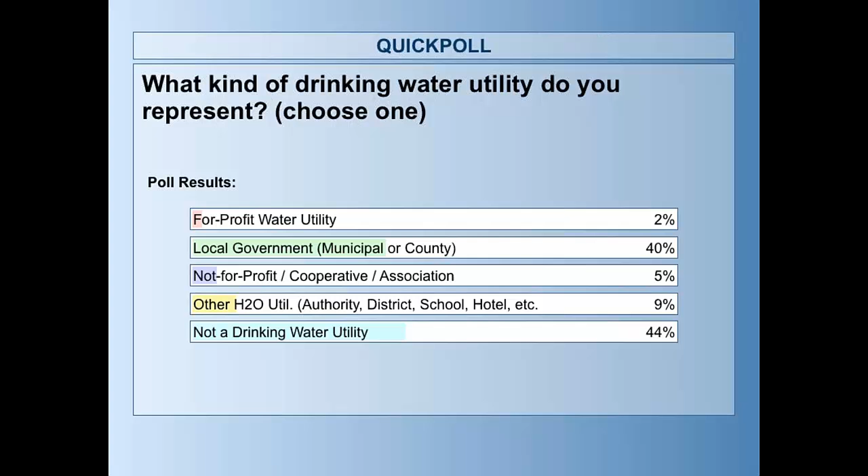Now, before I turn the presentation over to our speaker for today, I do have 2 quick polling questions for you. The first one is, what kind of drinking water utility do you represent? Please select from one of the following: a for-profit water utility, a local government, either a municipality or county, a not-for-profit, cooperative, or association, or another water utility such as an authority, district, or hotel, or you're from a non-drinking water utility. And getting ready to close the poll in 3, 2, 1. As you can see, it looks like we're a pretty close tie between a local government or a non-drinking water utility.

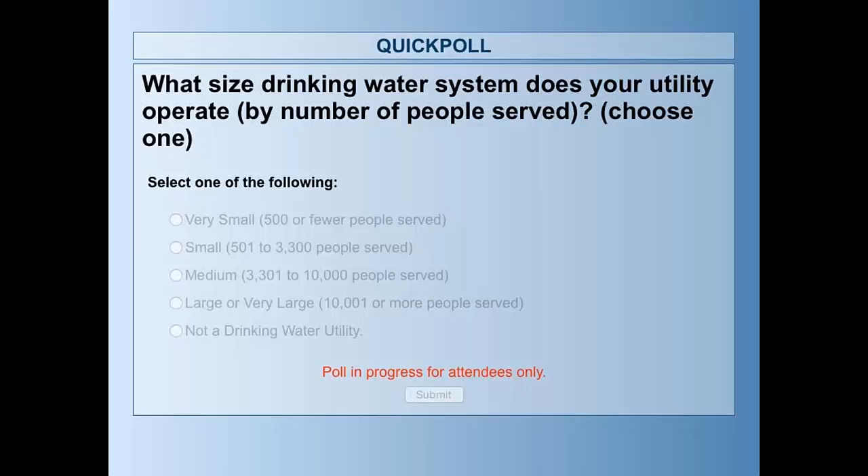And the second quick polling question is, what size drinking water system does your utility operate by number of people served? Please select from one of the following: very small, small, medium, large or very large, or from a non-drinking water utility. And getting ready to close the poll in 3, 2, 1. As you can see, the majority goes to a non-drinking water utility, followed by medium, and large and small water utilities are pretty close.

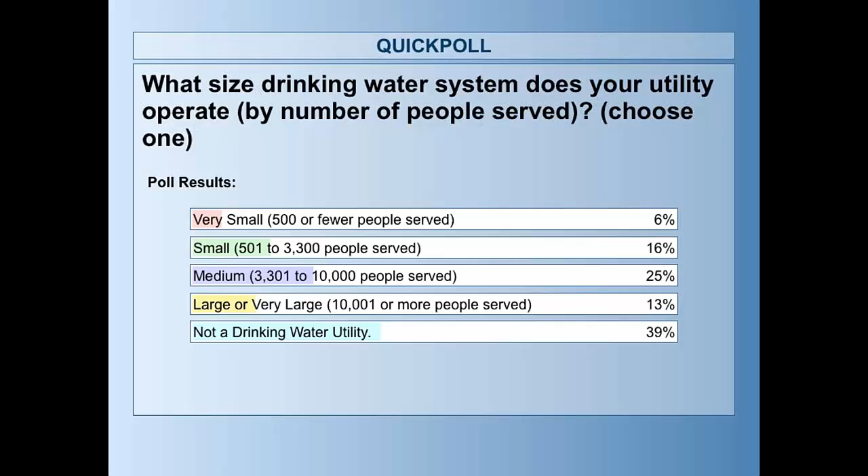Okay, I'm just trying to get my screen. Savannah, is my screen showing? Yes, it is. Okay, great.

All right, thank you, and welcome everyone to today's webinar titled, I've completed my water audit, now what? This is webinar 3 in a series of water loss webinars that we've conducted.

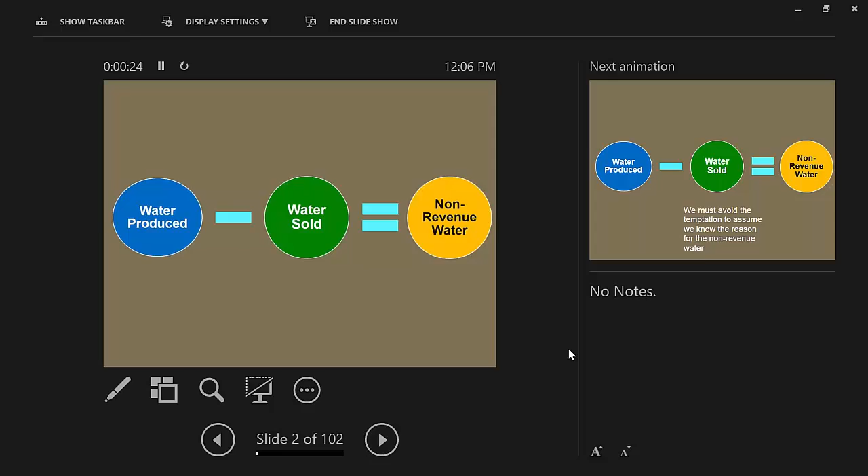I want to do a quick review here. Change your display. We can see your... Okay, hang on one second. Okay, did that fix it? Yes. Okay, sorry about that.

All right, so we'll start with water produced minus water sold is our non-revenue water. We don't want to have the temptation to assume that we know the reason that the non-revenue water exists. We don't want to assume that we have all the answers of why that non-revenue is there, what makes up that non-revenue, because we might make the wrong decision.

So imagine that you have a car and it's not running well. There may be several reasons why. Some might be small, low dollar issues. Some might be large, high dollar issues. So what would happen if we just jumped to the conclusion that it was my transmission? I took it to the car shop and said, without investigating any further, my car's not running well, go ahead and for $3,000 or $3,500 fix my transmission. When I get the car back, it still might be running poorly because maybe that wasn't the problem.

We wouldn't do that with our cars. We would ask somebody to evaluate the car and see what was going wrong because we wouldn't want to spend money in the wrong place. It's the same thing with our utilities. If we don't know the makeup of that non-revenue water, we may apply the wrong solution. So we don't want to jump to the end until we investigate it. And that's because non-revenue water includes a lot of things.

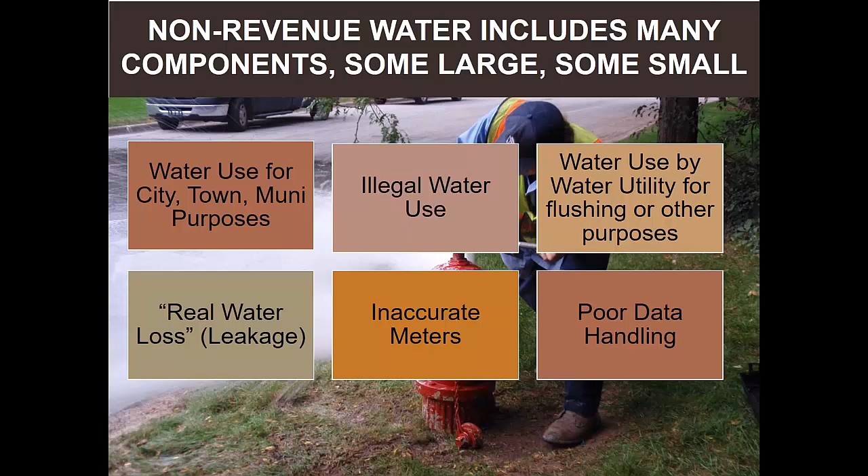There are 6 different types of factors that go into the non-revenue water. Sometimes we jump to the conclusion that all of our non-revenue water is water leaking out of our system, or it might all be inaccurate metering, and that would not be accurate. So we want to keep in mind that non-revenue water is 6 different kinds of things, and do a thorough evaluation of our problem before we make conclusions. We have to analyze the problem before we can address it.

A few highlights from that webinar are that the most important piece of data is the volume of water supplied to the system. When we think of the overall balance of water, all the columns add up to the same amount. The column that sets the standard is the volume supplied, and that has to equal the water being used for all these different purposes. The real water loss is at the bottom. We get the real water loss number by taking our water supplied and subtracting all the other uses of water.

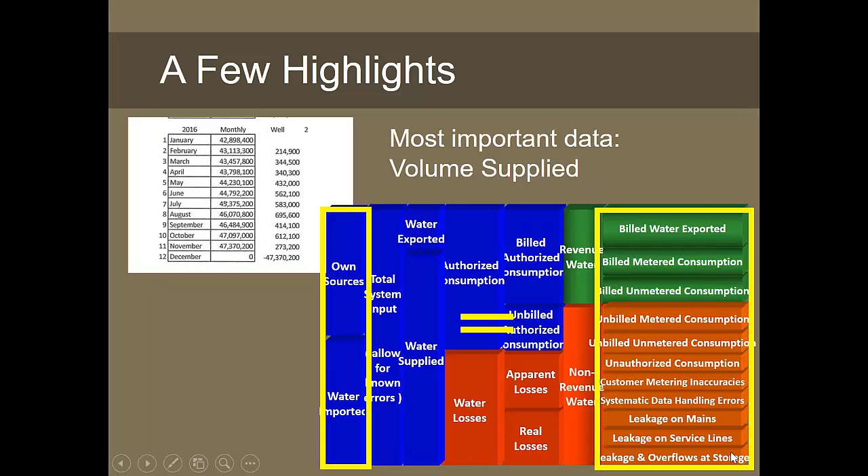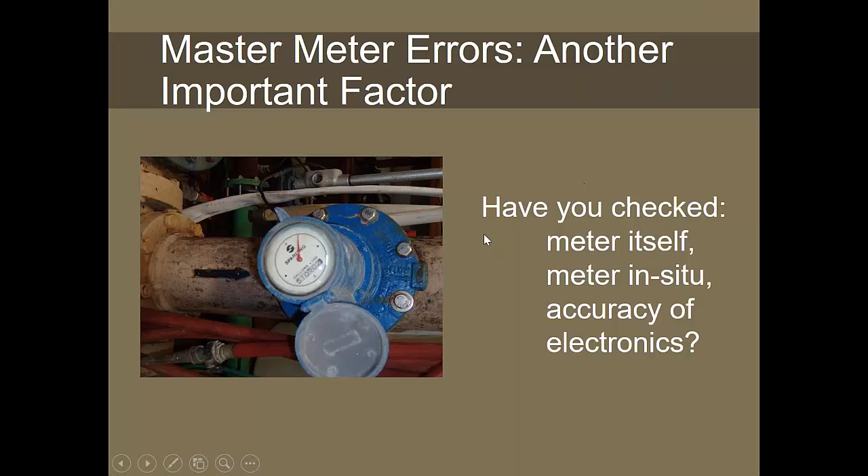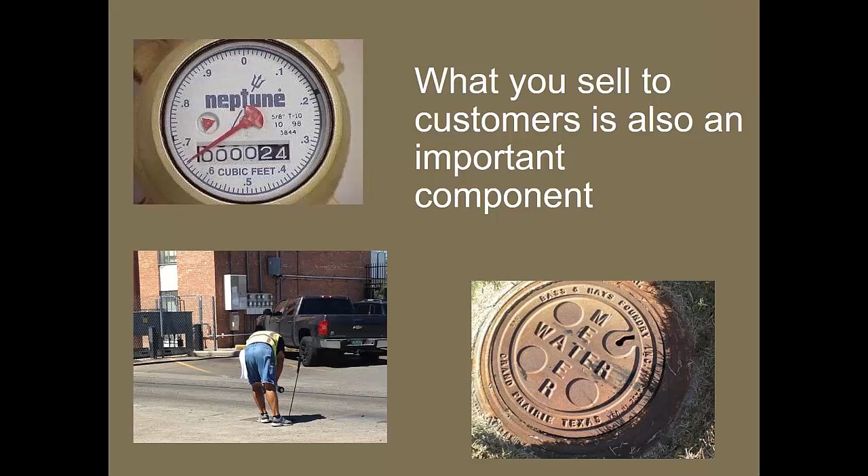So if the number for water supplied is off, it's going to create a problem for our real water loss calculation. We also want to think about the master meter errors. We want to know if we've checked the meter itself, the meter in its installation, and the accuracy of any electronics, because that can have a big impact. Another important factor is the water that we sell to our customers, because that's a big component of the water sold.

At the beginning, our data quality may not be very high. We might be a little intimidated about gathering the data. We might be missing pieces. Don't worry about that. If you start your audit and just jump into it, you can figure out where to make improvements over time. So just go ahead and start. The water audit itself uses the American Water Works Association water audit software. The software is free and available on the AWWA.org website.

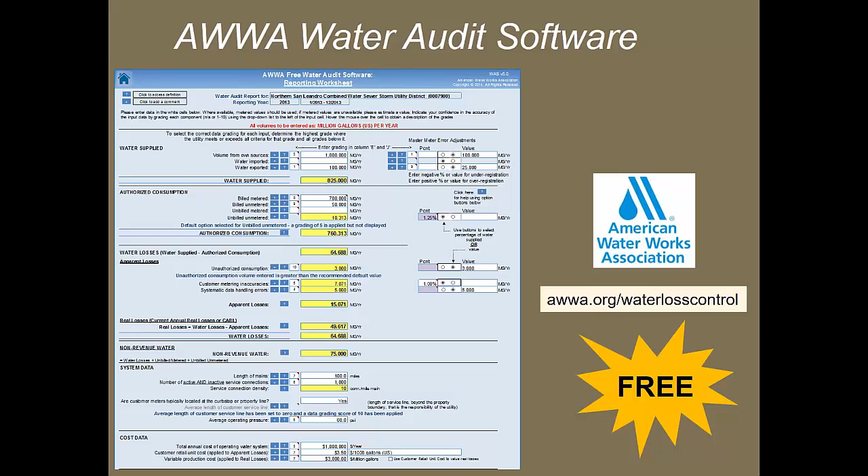And you can get that by registering, which is a free registration, and then downloading it to your machine. You'll begin the audit by looking at the instruction page, entering some information there, then put your data in the data reporting sheet, and then finally you'll be doing a data grade. So each input that you put in, you'll give it a data grade to say the policies and practices that went into getting that piece of data.

And the most important thing when you're doing your data grades is to be honest about what the data grade should be, because the right data grade is the one that accurately reflects your particular situation. You don't want to just arbitrarily give it a 7 or an 8 or 9 out of 10 without really looking at your system, because you will have an overconfidence in your data if you do that, and you won't know where to make improvements.

Webinar 2 covered the data entry and the data grading procedure, and that's available on the efcnetwork.org website. So if you'd like to go the step further, once you've got your data, how to put it in and how to grade it, please access that recording for more information.

So let's assume that we've done our water audit. So what does the water audit tell us? There's 3 main components that we'll get out of the water audit. The first is a data validity score. The second is the value or the cost of water in different categories. And the third is the volume of water in different categories.

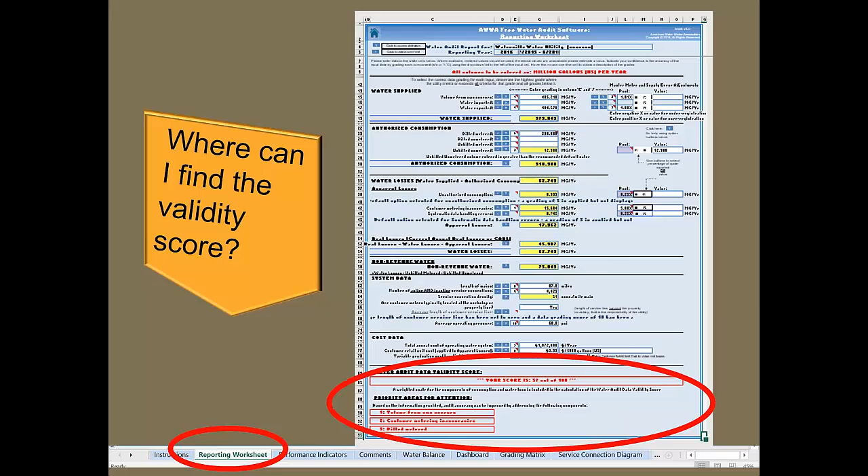Now, where can I find this data validity score? I would look on the bottom of the reporting worksheet, and the bottom of the worksheet is going to look like this. So our water audit data validity score is going to be a score out of 100. So in this case, we have 57 out of 100 for this example audit. And the screening range we have set is greater than 50, you're ready to move on to the next step, and below 50, you're not.

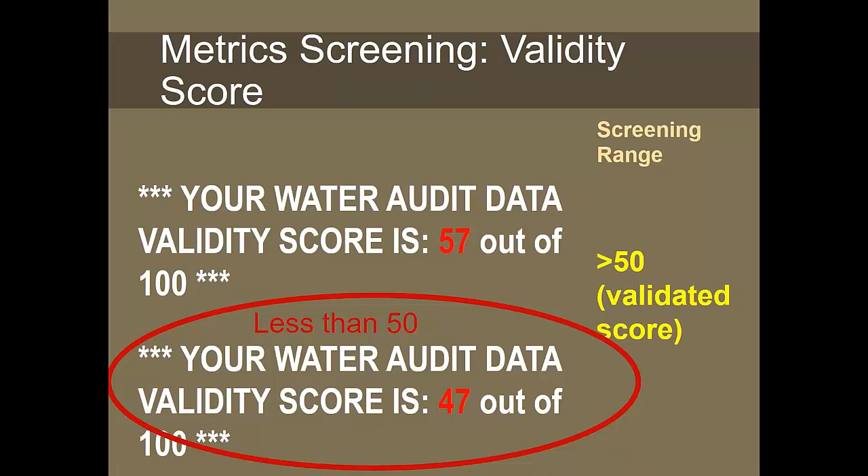So for the first example, 57 out of 100, that system is greater than 50. They can be ready to move on to the next step. Doesn't mean they won't do anything more to address their data, but it means that they're in a position where they can start doing more. And less than 50, you would want to stay with the data, with the policies and procedures that went in the data. Try to improve that and get above 50 before you go a whole lot further in the next steps.

So again, actions to take if your score is less than 50. We're going to look at the suggested areas of improvement to try to make those scores higher. We'll review data and look for concerns in the data. If you're 50 to 70, we'll look again at the areas of suggested improvement. We'll begin some next steps, but we'll still review any data weaknesses to see how we can improve. If we're above 70, we'll look at areas of improvement again, and we'll review the areas that have lower data grades. So we might have a pretty good score at 70, but there'll still be areas that may have lower data grades, and those would be areas that we could still work on.

The priority areas for attention are at the bottom of the reporting worksheet. It will give you the top 3 areas for your particular situation, and the data grades are not weighted equally, so it's going to give you the types of things that will have the most impact on your validity score. So the volume from own sources is often the first one up there because it is such an important number, and unless you have a 9 or a 10, it's probably going to be the first thing on the list, because that's where you'll have the greatest impact on the overall validity score. And then we'll give you the next 2 that will give you opportunities for where can I improve.

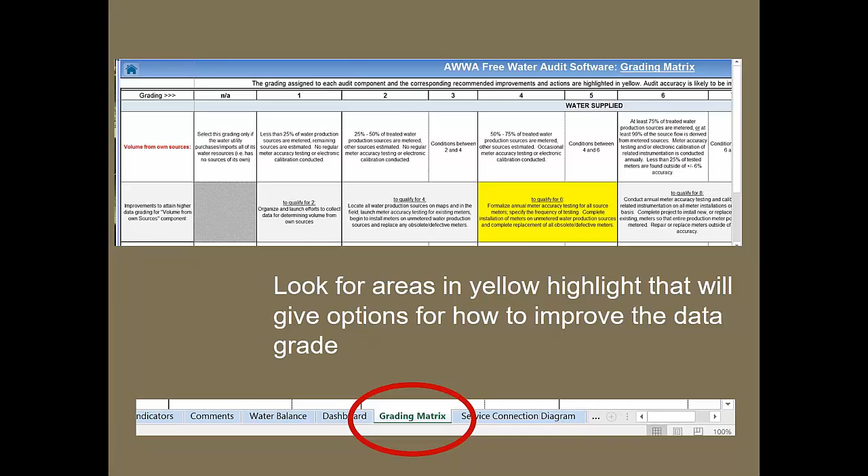You'll also have information in the grading matrix that comes with the water audit, and it will tell you, highlighted in yellow, what kinds of actions you can take to move to the next highest data grade for each of the data grades that you have in the system.

And there's also a water loss control planning tab in the water audit, and it will tell you, highlighted in yellow, which area you're in. In this particular case, we were 57, so it's saying we are level 3 and is giving us suggested actions to take. And you can see that the lower your score is, the more they want you to stay with data handling. The higher your score, the more you can do with addressing non-revenue water.

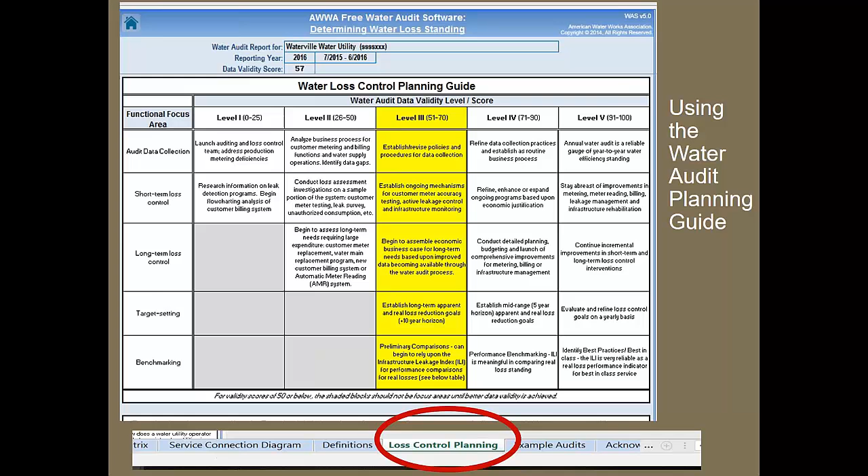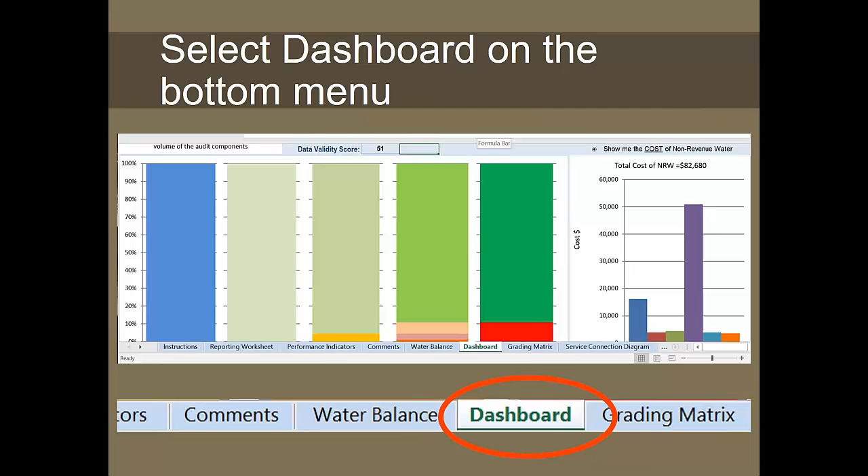So if we move on to looking at the values and volumes, the dashboard on the water audit will give you some information about the values and volumes. So you have an opportunity on the dashboard to toggle between show me the cost of non-revenue water and the volume of non-revenue water. So one thing that's interesting to note is the value and volumes don't always match. So the highest volume doesn't necessarily mean it's the highest value. It really depends on your system characteristics, how much you charge for water, how much it costs to produce water.

So we have to think about what's more important to us, saving the water or increasing the revenue, because we may decide to take a different action depending on what our goals are and what we're trying to accomplish. Or we may decide to do one first before the other. Maybe increasing the revenues could help us address some of the water loss and volume issues.

You will also in the water audit get some performance indicators. On this page it will give you things like the apparent loss, total volume, the real losses, the water losses combined. It will give you some information about the cost of apparent losses and real losses. And then it will give you some metrics for operational efficiency, so real losses per connection per day or real losses per length of main per day.

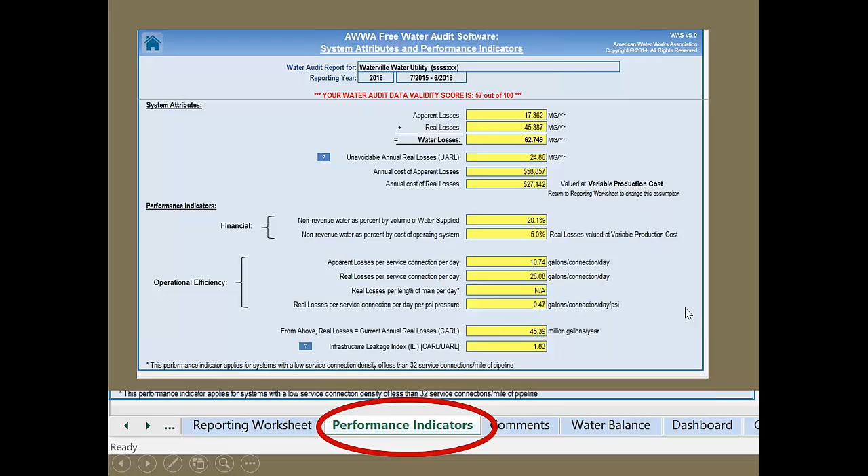And we can use a screening range to kind of see whether we're falling within the range of validated audits. So some folks got together and looked at a whole bunch of audits and said, once they had validated them, what was a typical range? So for real losses per service connection per day, it's typically between 20 and 200. And real losses per length of main per day is 400 to 4,000. Your utility will get one of these calculated or the other. You won't get both. So you can look and see if you're within the range of validated audits.

And what you can do with this is see where you are today, and you can choose a goal to reduce. So this particular utility is about 28. If they wanted to reduce the real losses, they could set a goal of maybe 25 initially or 20 initially and try to get that number down a little bit to reduce the real losses.

There's also the infrastructure leakage index. We will not spend a lot of time talking about this today because small utilities typically don't have metrics that will allow it to be calculated. But if you have that calculated for you, the range is typically 2 to 10.

So what actions can we take to actually address our non-revenue water? So one thing to remember is that there isn't one right answer for if I do this, my non-revenue water will be reduced to a very low extent and I'm done. You really have to have a whole toolbox of a bunch of different approaches to address the different kinds of non-revenue water that you face, and you're going to have to apply them in a phased-in manner, trying to decide what's the most important thing for you to do first, second, third, etc.

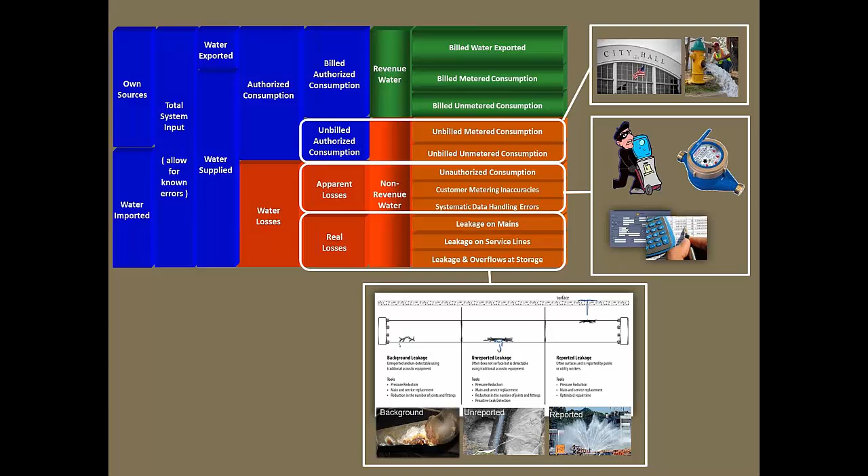But it's very, very important to realize that this is not a one-size-fits-all, one approach that will address water loss and take care of the problem. So they have three main areas for non-revenue water, three main categories: the unbilled authorized consumption, apparent losses, and real losses. So we'll go through each of those and look at some things you can do to address each of those.

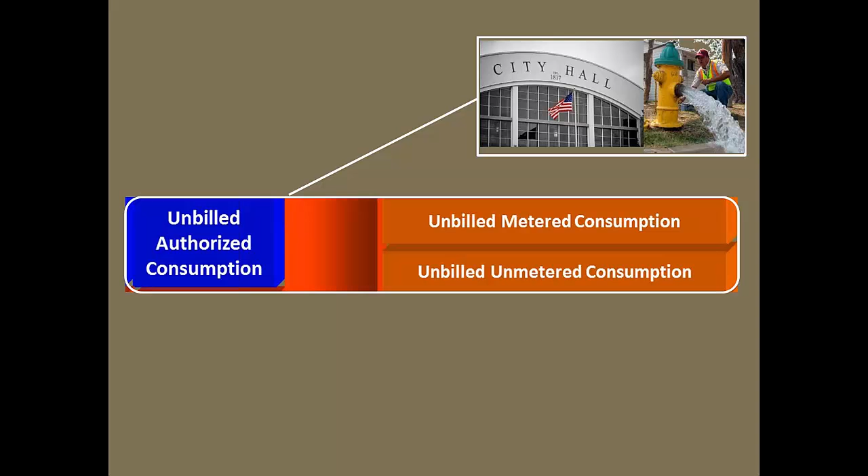When we talk about unbilled authorized consumption, these are folks that we're allowing to use the water but we're not billing. It falls into two different categories: those we meter and those we don't. Metered installations are typically permanent uses of water, like a building or a park, where we're sending water but not sending a bill. Unbilled, unmetered uses would be flushing, firefighting, things we wouldn't typically meter but do on a non-permanent basis, like moving around the system to flush lines.

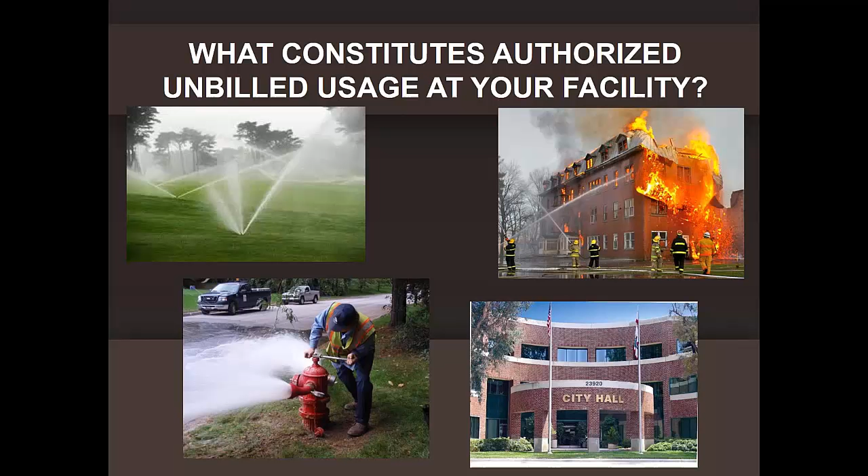You want to think about what constitutes that authorized unbilled usage at your facility. How much firefighting do you have? How many public buildings do you serve water to that you don't bill? How much flushing do you do? How often do your fire company folks come out and flush hydrants and test them? Do you have any parks or golf courses that you provide water to that you don't bill? The big issue is, do you meter all of your permanent uses?

If you don't, you really want to install meters for several purposes. One is to understand in your water audit how much of that authorized unbilled use is there. You also want to make sure people are using the water efficiently, because these are folks who aren't being billed, so there's no price signal for them to conserve. Also, if there's any problem like a leak, reading the meters on a routine basis can alert you that there's a problem, and you can go fix it.

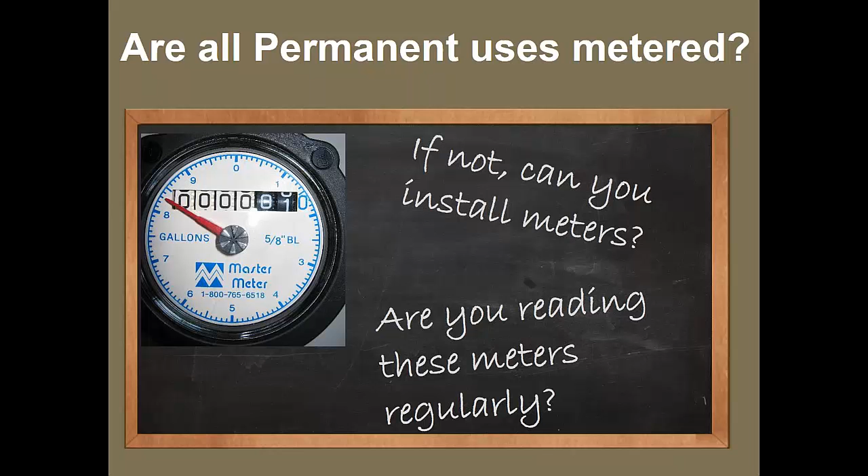So if you install the meters, you want to read them regularly. If you read meters monthly, you want to read these ones monthly as well. If you read quarterly, you want to read them quarterly. You want to be on the same cycle of reading all the other customer meters so you can gather that information about what's going on at your unbilled authorized uses.

Then you want to think about whether there are ways to estimate those non-permanent uses, like flushing and fire hydrant testing. You can use a default value in the water audit, and probably to begin with you'd use that default maybe even for a couple of years. But after that point, you'd want to find ways to improve the quality of that data and get a better estimate of how much water is being used.

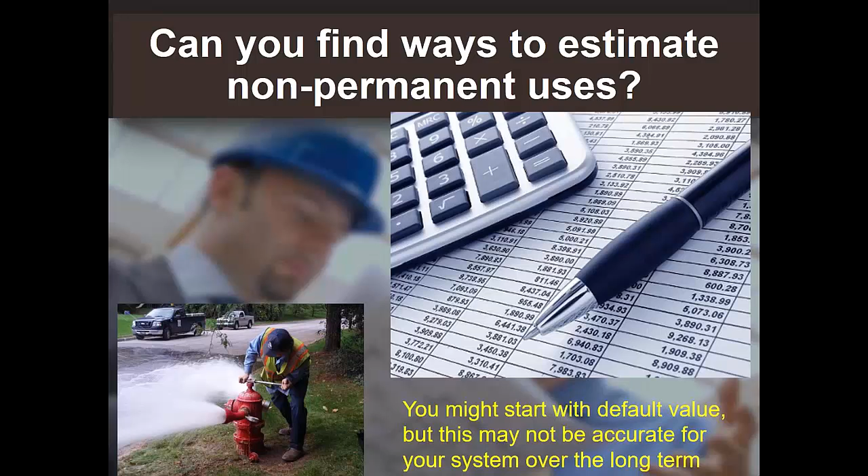Think about ways you could temporarily meter flushing, count how many hydrants you flush, how long you flush them, that sort of thing, to try to get a handle on how much water you're actually using in this non-permanent way. With that information, you can figure out how much water by volume is authorized and unbilled for each of those uses.

How much do I put on a park? How much do I put on a ball field? How much do I send to City Hall? How much do I send to the airport, etc.? Then you can figure out the value or cost of each of those using your customer retail cost. Dollars per 1,000 gallons could be applied to each of these, so you can tell how much money and how much water is going to each of these uses.

A couple things you can do with that information. You can share the value with the entity that's receiving it. So if you're sending it to a building, you could tell the folks who manage that building, hey, you've used this much water, it's cost the city this much, or you've received this much benefit from the water. That gives them a chance to look at ways they could improve, and it signals the benefit received and how they might help you by reducing uses.

You also want to make sure it's transparent, that the governing body knows what each of these uses are and can make decisions about whether any of those currently unbilled and authorized uses should be changed to billed authorized uses. Is there any customer that currently receives no bill that should receive a bill? They can really decide which ones should remain and which ones should change. In summary, we want to know what is authorized and unbilled, so we want to know what falls in that category.

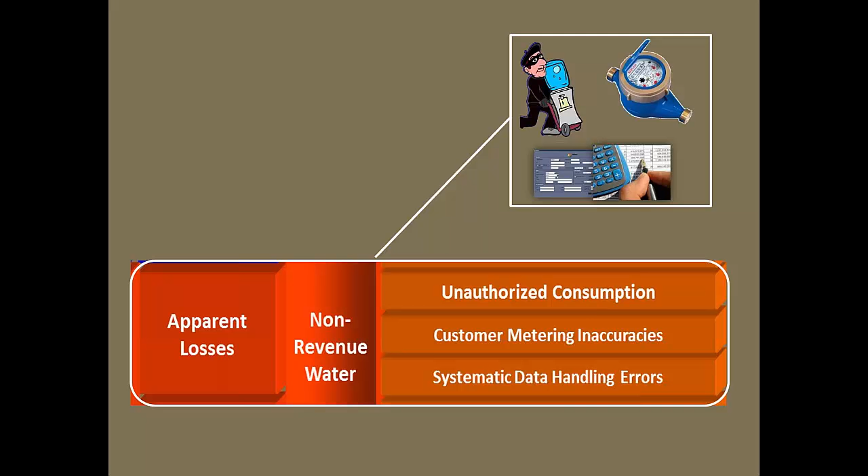When we go into apparent losses, we have three categories: unauthorized consumption, customer metering inaccuracies, and systematic data handling errors. Starting in this area, we have what we call the 4 pillars of apparent loss control.

We look at customer meter testing and replacement, and theft deterrence, trying to keep people from wanting to steal. Then there are two types of quality control with our data: when we get our meter readings and transfer those to the billing system, trying to make sure that process is done well, and looking at our billing procedures when we transfer that data to the archives.

And then there'll be some that's economic to reduce. So you're just looking at where you can spend your money wisely to reduce the amount of apparent loss and not go overboard investing way more than the benefit you would receive.

If you look at customer meter accuracy testing, this is pretty complicated because you have a lot of meters. They could be commercial, institutional, or residential, different sizes, different amounts of use. So it gets much more complicated than looking at your master meters, where there are probably a lot fewer of them and it's easier to run a meter testing program.

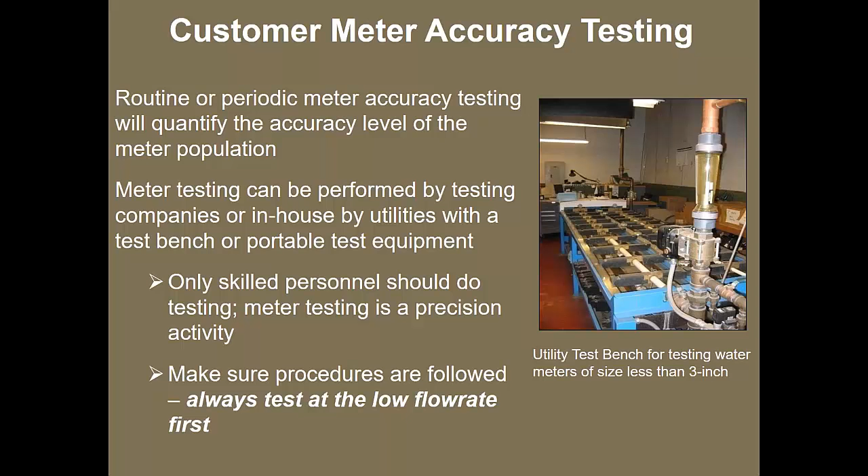But you can test your customer meters, and they can be done by an outside firm, or you can do it in-house if you have the right equipment. You want to make sure you have the skills and ability to do the actual meter testing. You don't want to take this on if you don't have that capability.

And the accuracy testing can be done over time, because it's really hard to get out there and do a full-bore program right off the bat. So you might choose to test certain meters at the beginning and then build in other phases of the program. Think about ways you can set goals and which ones you'd want to do first.

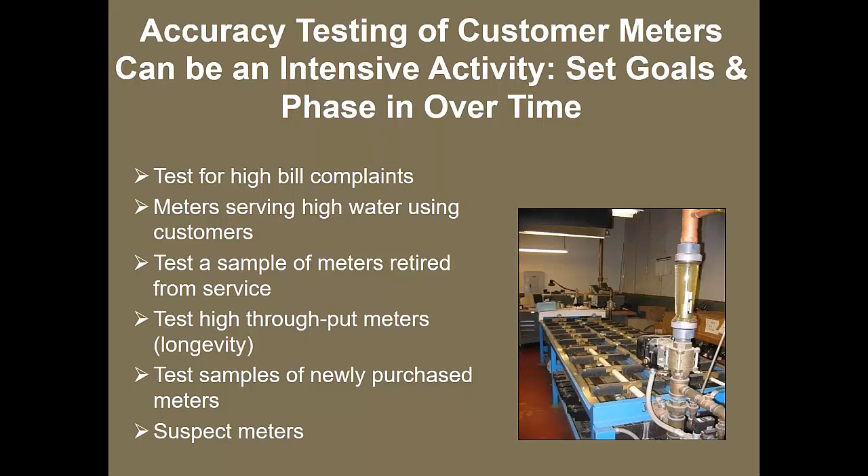Would you want to choose the ones that had the highest volume? Would you want to choose the ones that had the most complaints? Would you choose a certain type of meter or a certain size of meter? Anything like that could be a starting place, and then you can always add in other categories later on.

The AWWA M6 guide is a good guide for selection, installation, testing, and maintenance of meters. So if you want more information about meters in general, there's some good information in that guide about how to do the testing procedures and that sort of thing.

You can also talk to your neighboring utilities and that sort of thing, to ask them how they've done meter testing and who they've worked with, to try to get options for how you might do it.

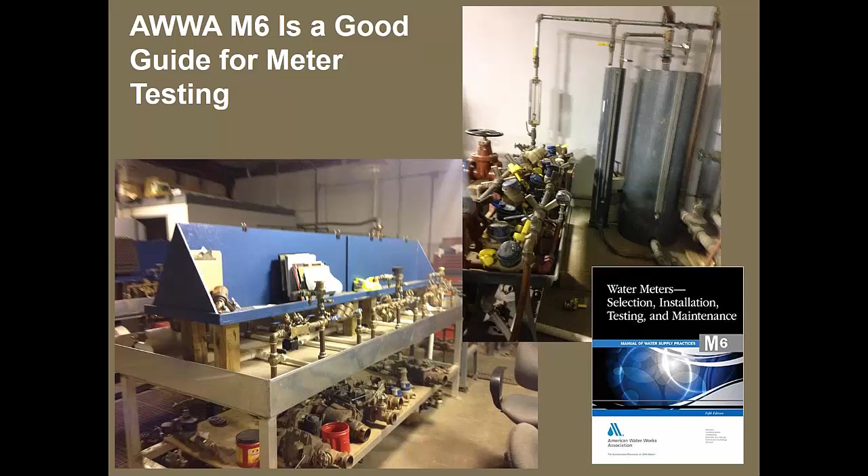You might also check with a larger utility. Many of the large city utilities have meter testing equipment, and they may know a lot about how to do meter testing, or may even be able to work out a deal where you pay them a certain amount of money to do the testing for you. So look at all the options available to you and try to design a program that best fits your needs.

One example of having done meter testing in this small community: you can look at how the accuracy data could plot, versus the flow through the meter, the total flow.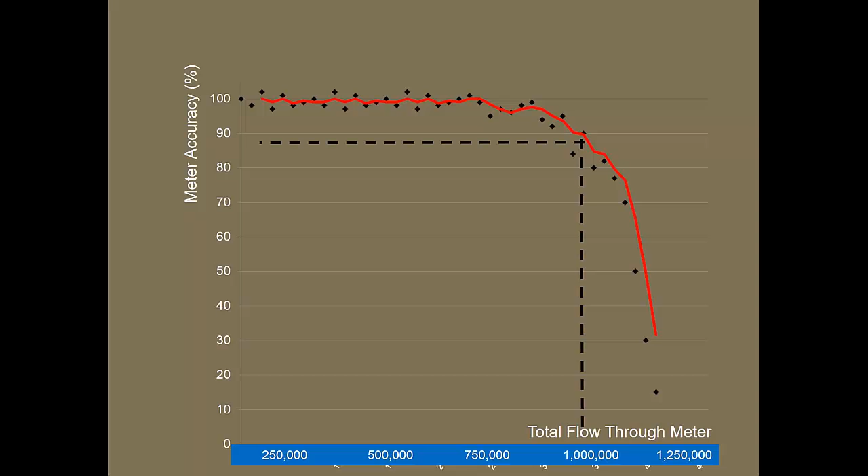You can see that the accuracy really started to drop off after 1 million gallons. So in this particular utility, if they found that 1 million gallons was a good breaking point, where meters start to get a lot worse in accuracy, they could design a program that says every time a meter hits 1 million gallons, we're going to take it out and replace it.

In data handling errors, we're looking at things that we do that cause errors in water auditing.

One example is if you have an archive system in your billing software where a new customer comes in July, and we take the data from January to June for the old customer and archive it. From a billing perspective, that may be fine; we don't need the information anymore, it's a different customer. But from a water auditing standpoint, that makes a huge difference, because we lost a whole half a year of flow that won't show up when we print out the totals from the billing software. If we have situations like that, it can be really problematic, and we need to find another way to gather that information, especially if you have a lot of customers switching during the year, since that could be a huge error in your data.

Another possibility is if your utility rebates money back after a large household side leak, saying 100,000 gallons passed through your meter, but it was a leak, and you've agreed to fix it, so we're going to rebate some of that back. Some billing software requires you to actually change the quantity to get the lower bill rather than just changing the amount of money you're going to charge. In that case, you will have lost a whole bunch of water that actually passed through the meter, and you need to account for that in your software. So somewhere you need to keep track of that water.

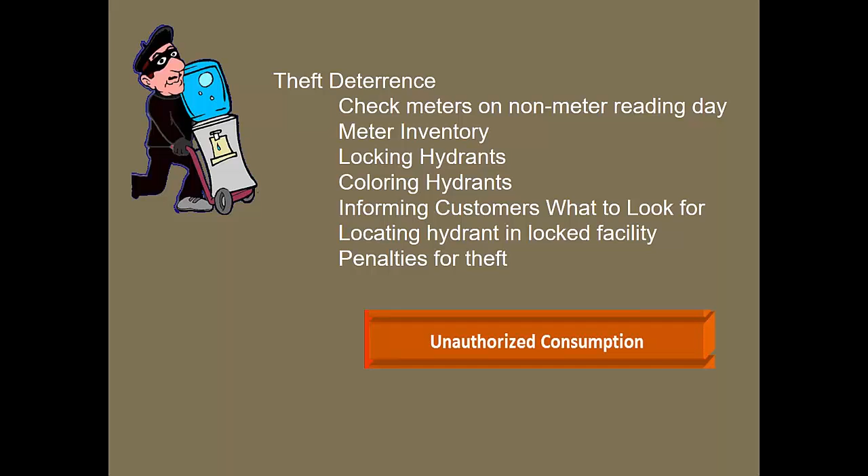You can have penalties for theft, and tell your customers to let you know anytime they see someone hooking up to a hydrant. You could also put a hydrant inside a locked facility so that's the only place water can be taken, relying on customers' eyes to watch for anyone hooked up to another hydrant. Again, how much effort you put into theft prevention really depends on your particular situation.

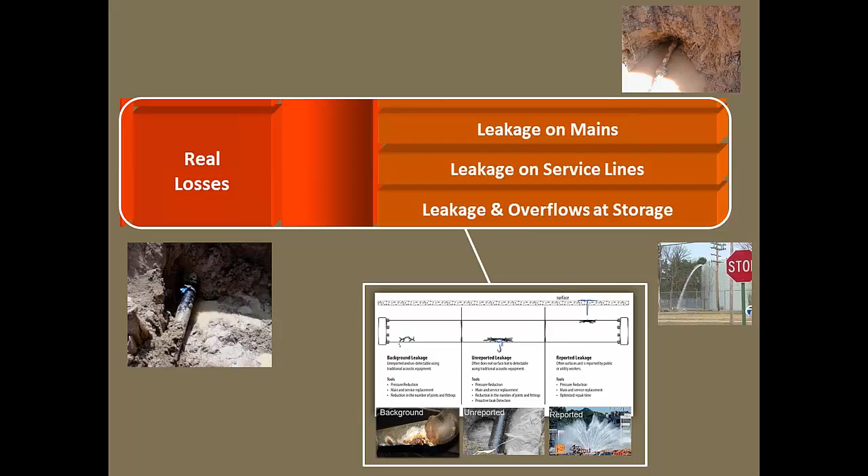Moving on to real loss, which is what oftentimes people focus on the most, forgetting the other two major categories of water loss. Real losses are leakage on mains, service lines, and overflows, and leakage at storage tanks. These are important components, but we can't forget the other two because they may be equally large or even larger in your particular utility.

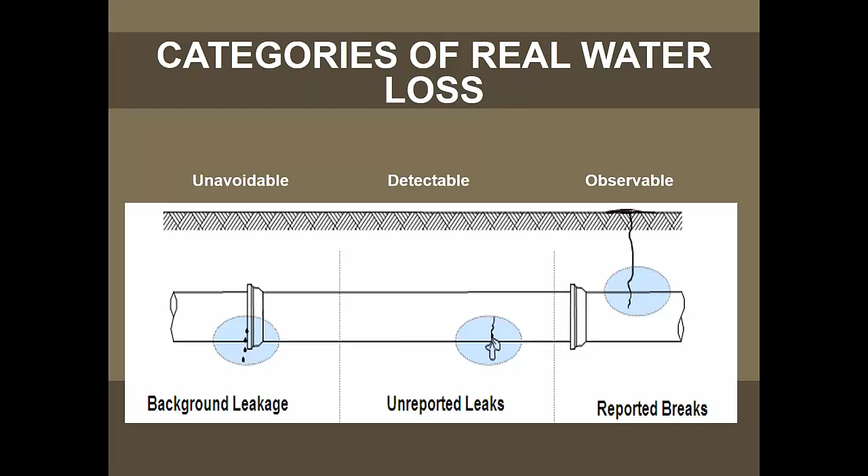When we think of real loss, there are three kinds of leakage. One is background leakage—weeps and seeps at fittings and joints. Then we have unreported or hidden leaks, which we do not see on the ground; there's no evidence for them, we can only find them by searching. And then we have observable or reported leaks, things we can find by seeing water on the surface, vegetation where it doesn't belong, sinkholes, or something developing that lets us know there's a water leak down below.

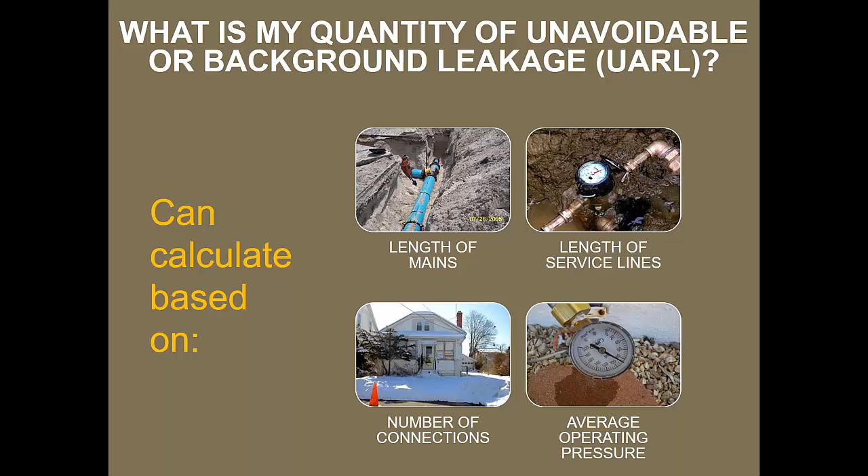The quantity of unavoidable or background leakage can be determined through system characteristics like length of mains, connections, and pressures. There is a range your utility has to be within for the equation to be valid, but the water audit software will calculate this for you if you're in that range. If not, it's a little more difficult to figure out the unavoidable or background leakage.

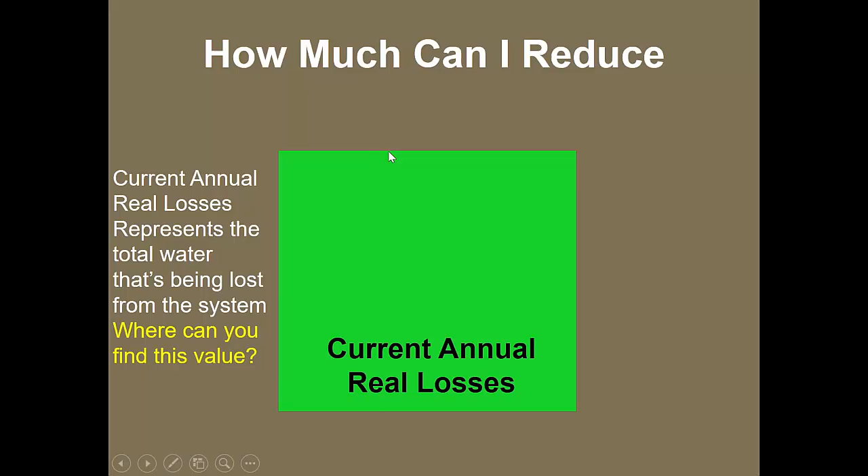So how much can I actually reduce my real water losses? If we think of this green box as the current annual real losses—the total losses—this value could be obtained from my water audit software. Then I have my unavoidable real losses, again obtained by looking at our system characteristics and using that equation. The difference between the two is our potential for real water loss reduction.

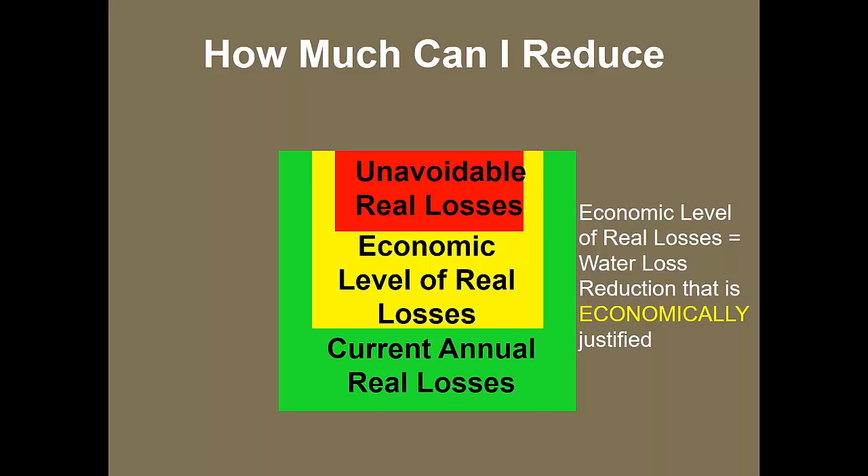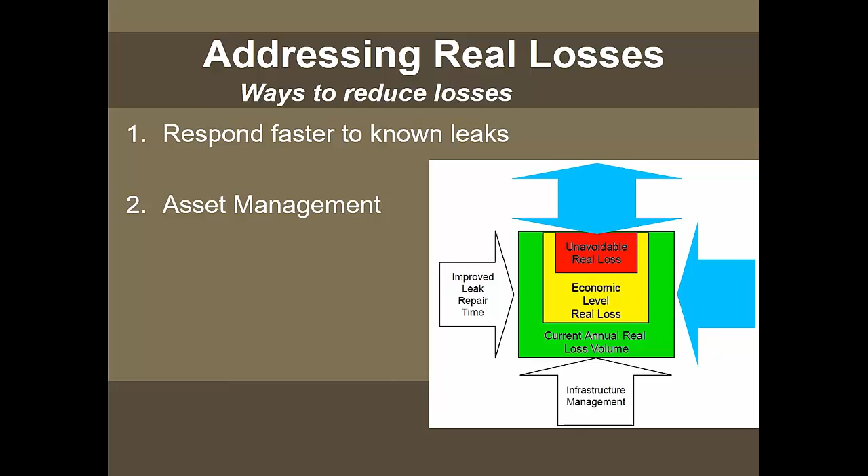So we have four pillars of real loss control. The first is improving leak repair time. The second is infrastructure or asset management. The third is pressure management. And the fourth is finding our hidden leaks.

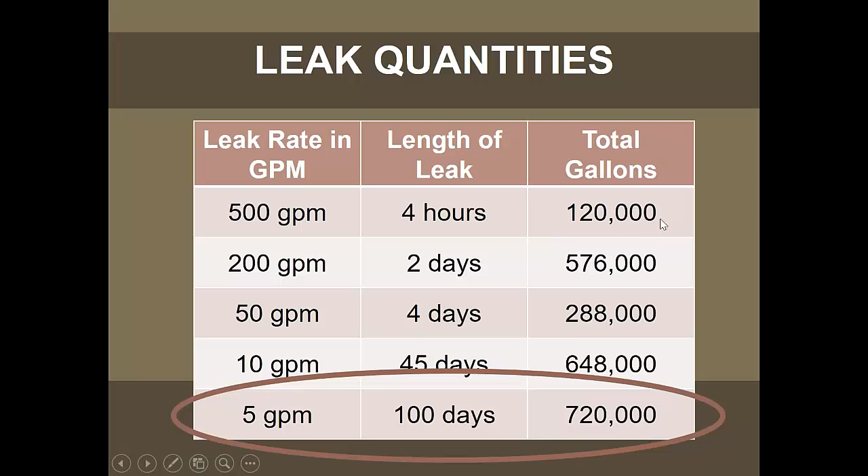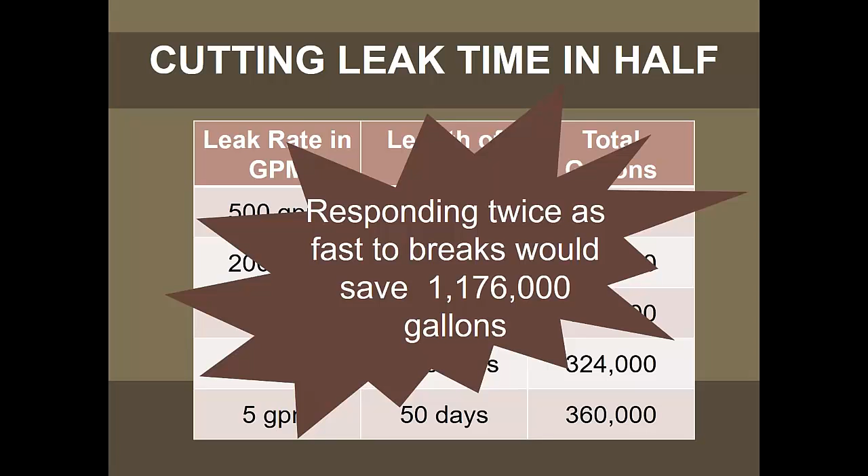If we respond to known leaks faster, look at this series of example leaks—the amount of water leaking and the time over which they leaked. A long duration leak of a low amount of water can actually produce quite a bit of water loss, way more than a high intensity leak over a short period. Let's say we cut the leak time in half. In just this case of these five particular leaks, that would save 1,176,000 gallons. The point is there is a savings to be had—if you can get out and fix leaks faster, you can save water, time, and money.

So you would have to make the case for needing additional resources. The reason you're probably not fixing leaks faster is you probably don't have enough personnel, equipment, supplies, etc. to do that. Make the case for what you would need to do it faster, what the cost is, what the benefits are, and increase the speed to the extent that your benefits, both economic and non-economic, outweigh the costs. There is a pretty good case to be made if you have a slow response time to reported leaks.

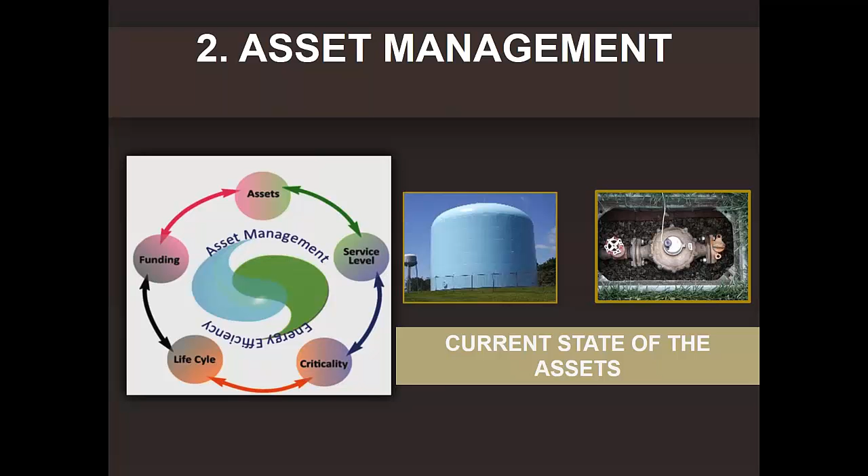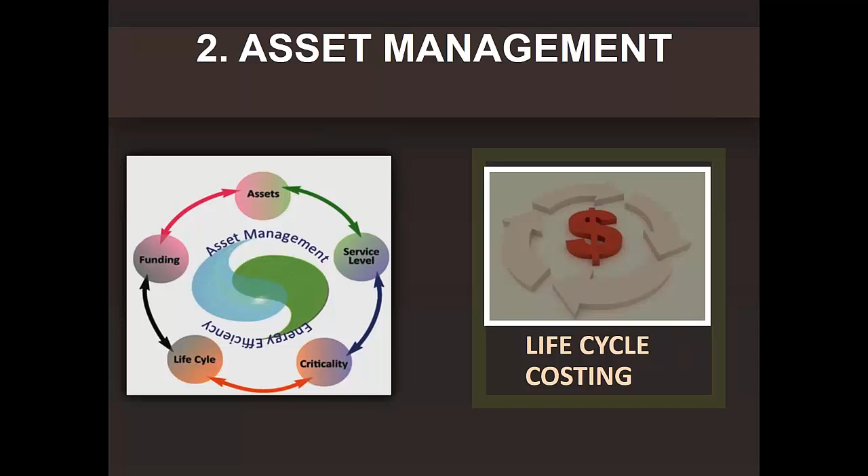With asset management, we're talking about the current state of the assets, level of service, what you want your assets to do, criticality—which assets are more critical to sustain performance—life cycle costing, how assets will be handled throughout their life, and long-term funding. If we apply that to the water loss situation, we're really looking at our pipes, so we want to gather data on our pipes.

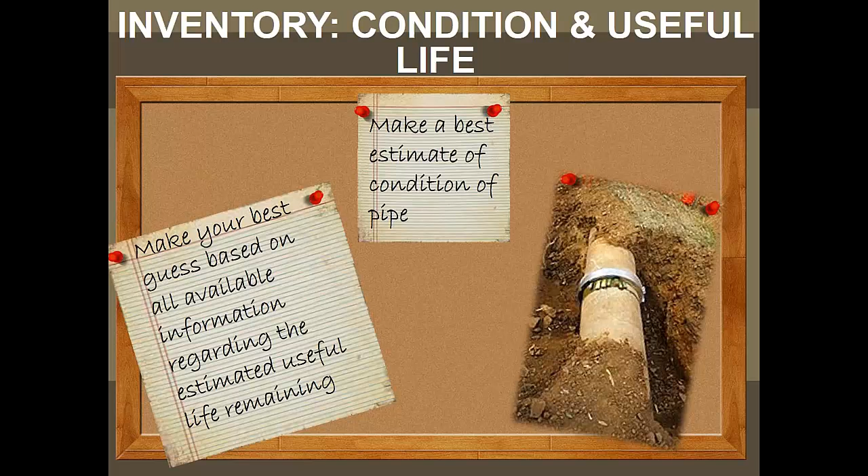We want to look at type, size, installation, etc. And we would want to have some kind of map where we could store that information. We also want to make a best estimate of the condition of each of our pipes and the useful life remaining. So how much longer will that pipe be able to be in service before it's no longer going to convey the water the way we want, or the break rate is going to be too high, or something like that.

So using our inventory and the cost, we can estimate a cost of replacement of our pipe. And this gives us an idea, combining that with our useful life remaining, we'll say how much money would we need to be able to replace our pipe. So if I think this much pipe is going to be lasting another year, that costs so many dollars per mile, this is how much money I would need in that year, or 5 years, 10 years, 15 years down the road. So use the best data available to estimate your costs and make that estimate.

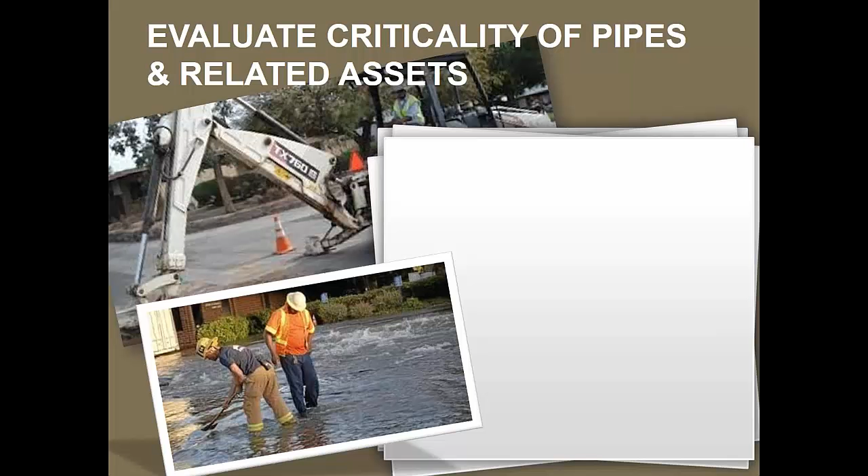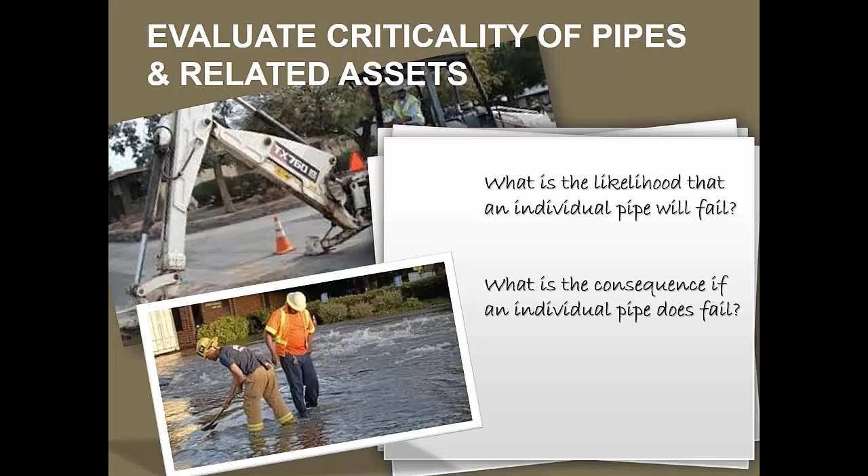Set some goals for what you really would like to have in terms of number of breaks per mile of main per year, or the gallons of real loss per mile of main, which is given to you by the water audit. When you're looking at criticality, you're looking at what is the likelihood or probability that an individual pipe will fail, and what is the consequence if the pipe actually does fail. And you want to plot it as the pipes with the highest risk are those that are very likely to fail, and if they do, it's a bad consequence. And you really want to think about those pipes being the ones you want to replace over the pipes that are unlikely to fail, and it's not really a big deal if they do.

And that gives you information looking at the criticality of which option you want to take whenever there is a pipe break. Do we want to repair it, rehabilitate it, or replace it? So we typically would repair low-risk pipes and probably replace our high-risk pipes. As we're looking at the different options, if it's a really high criticality pipe, that's one we're going to lean towards replacement, and low criticality we lean towards repair.

We can also collect data on pipe breaks. This is really good information to have. There's a recent study done by the Water Research Foundation that says collecting pipe break data is really one of the best ways to tell how much longer your pipe is going to last. They've done a pretty thorough analysis of different kinds of factors and decided that age was not a very good factor in determining when pipes should be replaced, that break data was a much better factor. So collect all the break data you can in terms of where it happened, how it happened, what type of pipe, the condition, anything that you can, and store it in a way in which it's easy to retrieve it.

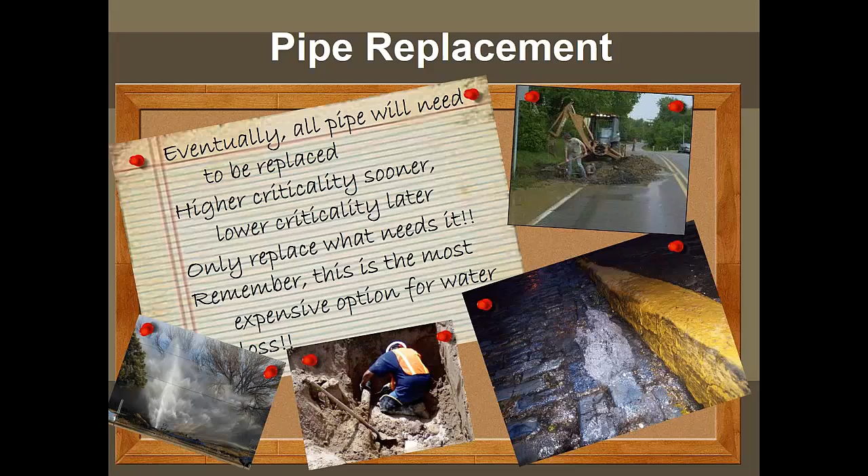Eventually, all your pipe will need to be replaced, and as we said, the higher criticality probably sooner, lower criticality later, but only replace the pipe that needs it. The most expensive option for water loss control is really pipe replacement, so you really want to be judicious about how much of that you do.

In pressure management, what we're looking at is pressure affects unavoidable losses. It actually affects all of the types of losses. As the pressure goes up, the losses will go up, and as the pressure goes down, the losses go down. So look for options for pressure reduction to see if it's possible to operate your system at a lower pressure. You wouldn't want to do this without talking to your engineers and making sure that indeed it's okay for you to reduce the pressure. But if there are options to do that, it could really save you water. And you can also look for options to reduce pressure surges and water hammer in your system, because that's another way that pipes break. So anything you can do to help your pressure is a good thing to do.

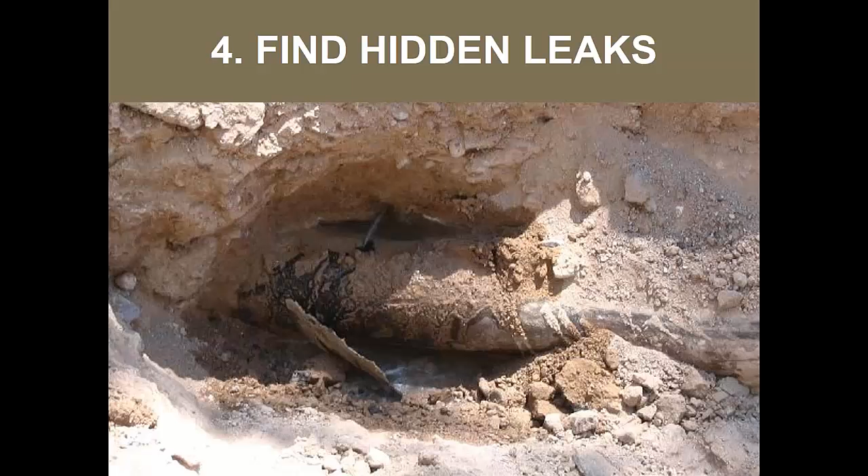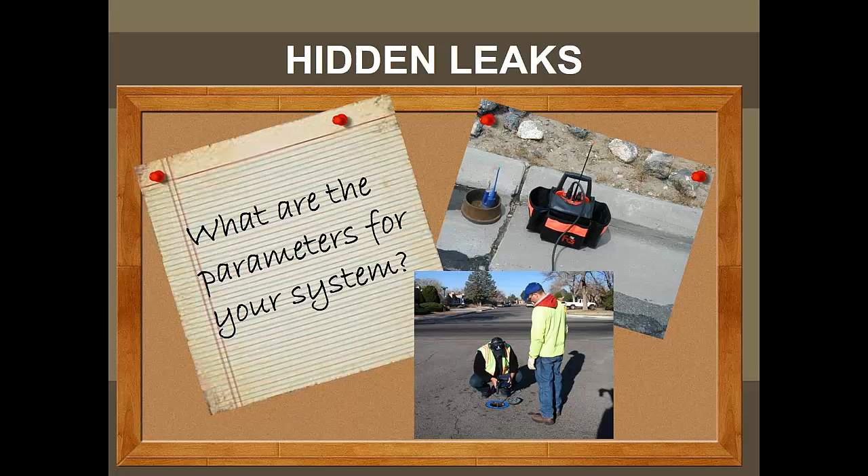You can also find hidden leaks as another method to deal with real water losses. So you can find hidden leaks by proactively looking for them. And you want to think about what the parameters are in your system, what type of pipe, how much pipe, and what type of contact points you have, because that matters when you're thinking about leak detection. You're going to have to listen to your pipe through these contact points, through meters, valves, hydrants, that type of thing.

And so you need to know how many of those you have, how spaced apart they are, because the closer together they are, the easier it is to hear a leak noise. The further apart they are, the harder it is. And thinking about the type of pipe, it works a lot better on metallic pipe than plastic pipe. So as you're looking at your system, do you have metallic or plastic? Do you have a lot of points, few points?

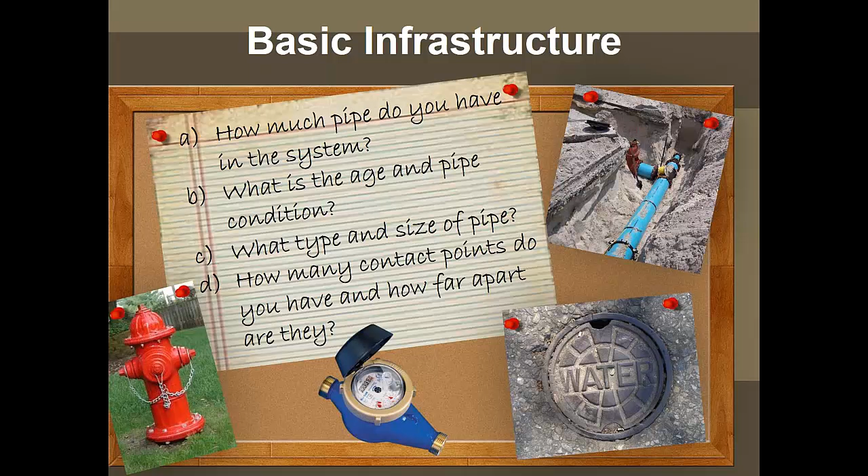Because you could spend a lot of money on leak detection and find out that it's not going to get you the results you want. One utility was almost brand new PVC system, assumed that everybody had to do leak detection, did leak detection, didn't find any leaks, thought that the leak detection company was bad, did it again, didn't find any leaks. And the situation was that they really didn't have the kind of system that would leak to begin with, and it wasn't the type of system that you were likely to hear a lot of leak noises anyway. So you really want to think about it before you take that on.

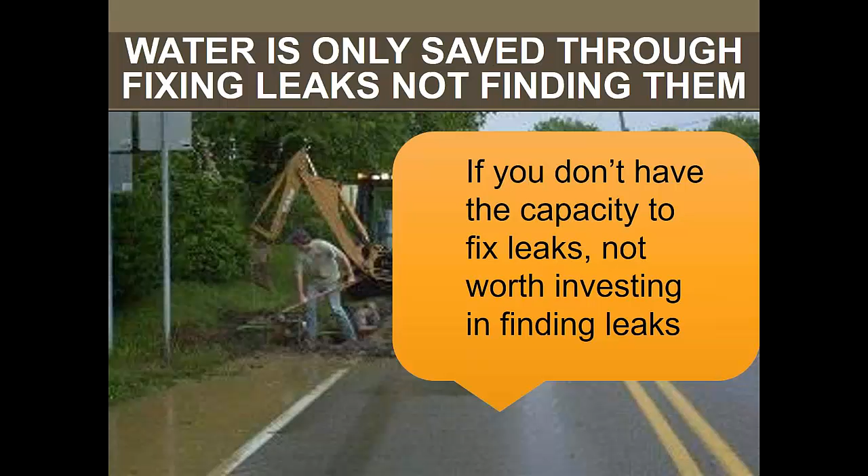And another thing to remember is that water is only saved through fixing leaks, not finding leaks. So somebody can go around and do a leak detection survey, but if you're not going to dig up the pipe and fix the leaks, you don't want to invest in the leak detection survey. You really want to match the two up. You want to match up looking for leaks and fixing them.

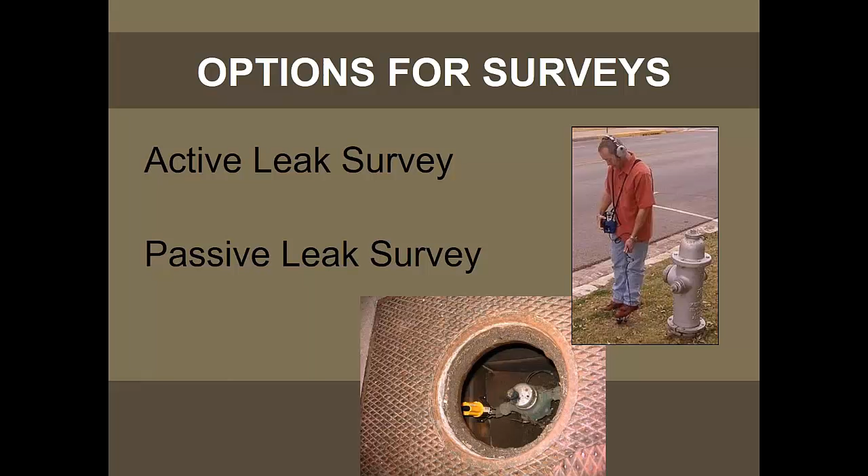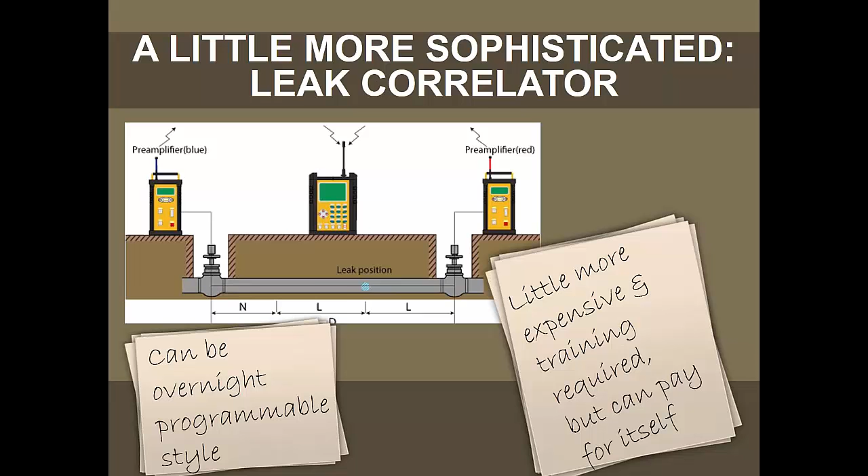You have the option of doing an active leak survey where a person goes around and listens, or a passive one where you have a device installed in your system that listens for leaks. Both types are based on leak noise and listen for leaks, and both of them have the potential to have false positives where it might hear something thinking it's a leak and it isn't actually a leak. There are some tools that you can use, things like ground microphones that help amplify the sound, and leak correlators that are a little more expensive technology, but with training that can be a good way to pinpoint your leaks.

You can survey the entire system, part of the system, or a sample of the system, and you can use contractors or in-house personnel, and you're kind of looking at whether you can train up staff, how much you're going to be doing with the staff. You don't want to spend a lot of money on equipment and training if you're only going to do this once every couple of years. You probably hire a contractor in that case. But you have either option.

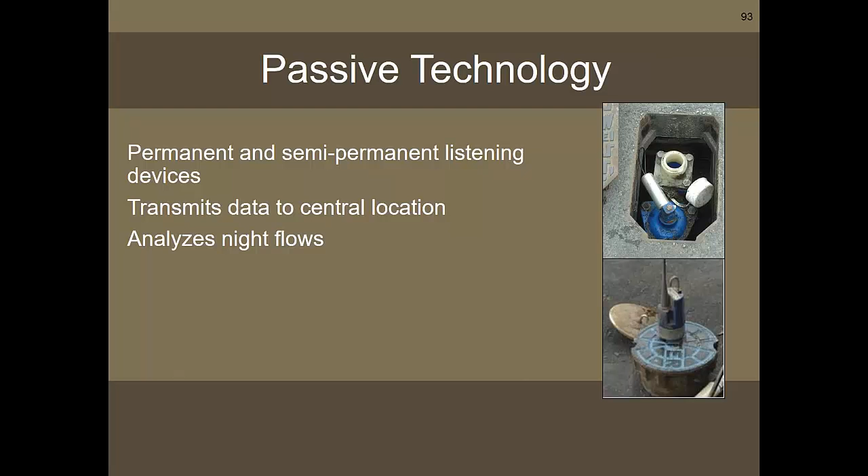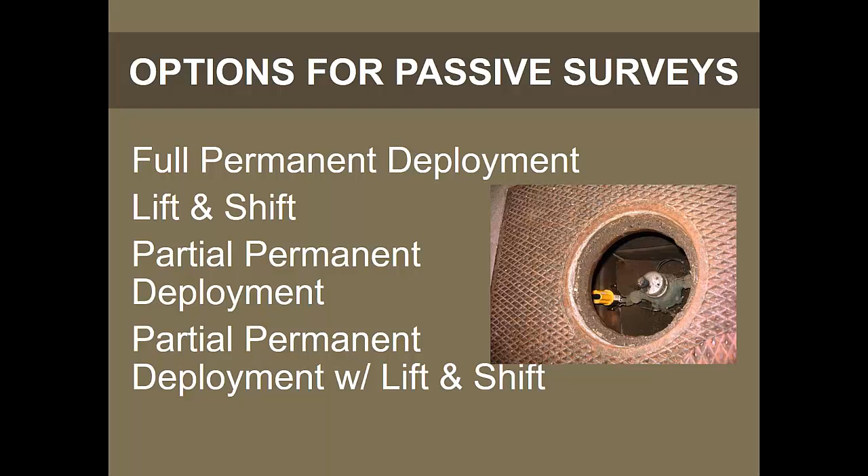With the passive technologies, you can do permanent or semi-permanent deployment. You can have devices on all of your valves. You can have them on some of them. You can lift and shift them around your system. So there's a lot of different options for how to do passive surveys. Which one you choose really depends on the cost of getting those little devices and putting them in your system, the fact that those devices listen at night and the people are more likely to be out during the day, and how difficult it is to do a night survey, the types of leaks that you have, the types of pipe and that sort of thing. So there's a lot of different reasons to pick one over the other.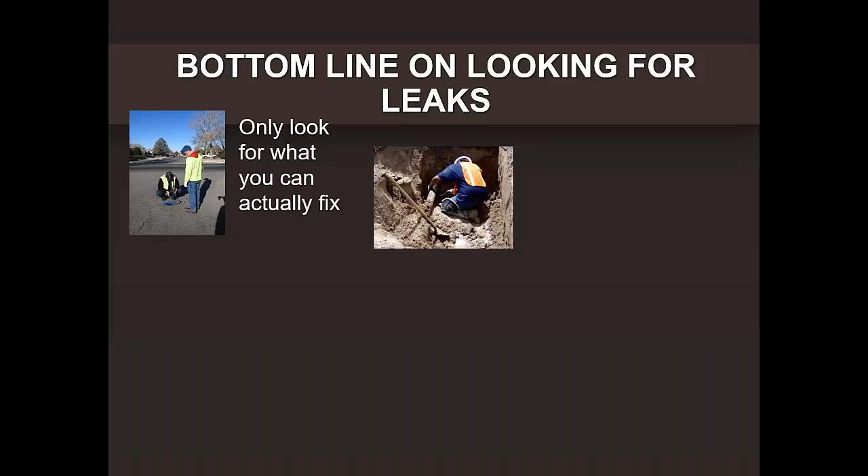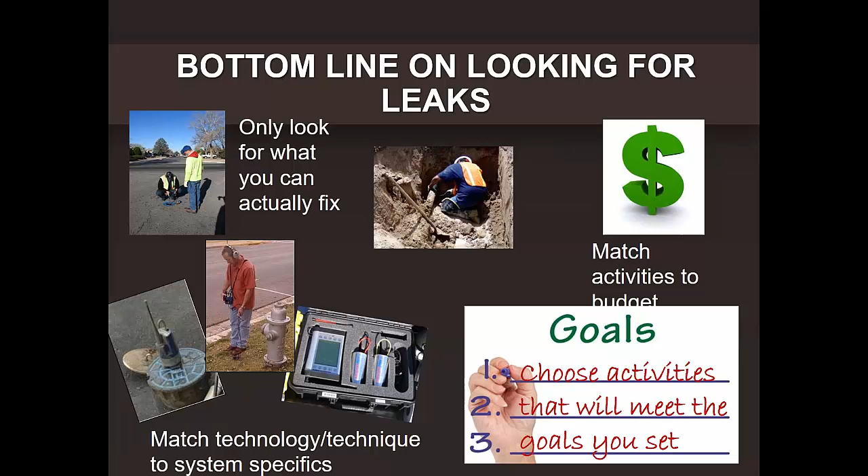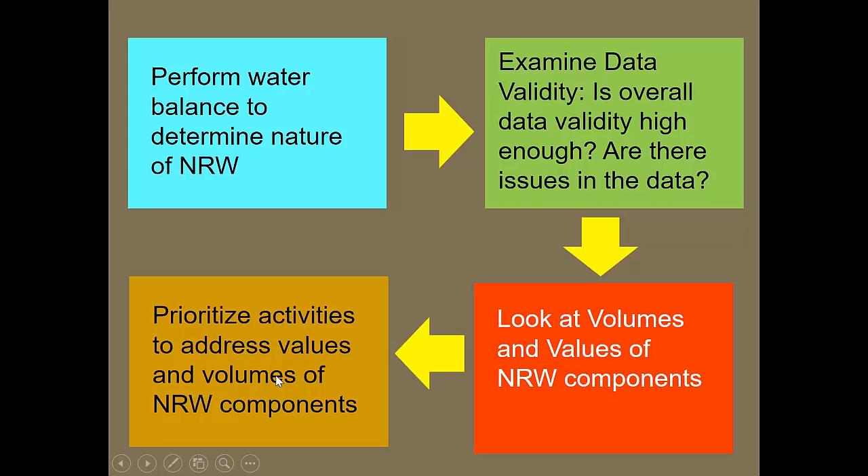So the bottom line on looking for leaks: look for what you can fix, match the technology and techniques to your particular system, choose the activities that are going to meet the goals that you've set for your system, and match your activities to how much money you have to spend. So applying the tools from the toolkit, we want to start out again with performing our water balance to see what non-revenue water we have. We want to look at our data validity, make sure it's high enough, and see if there's any issues with our data. Look at the volumes and value of non-revenue water. Prioritize activities to address the values and volumes of non-revenue water.

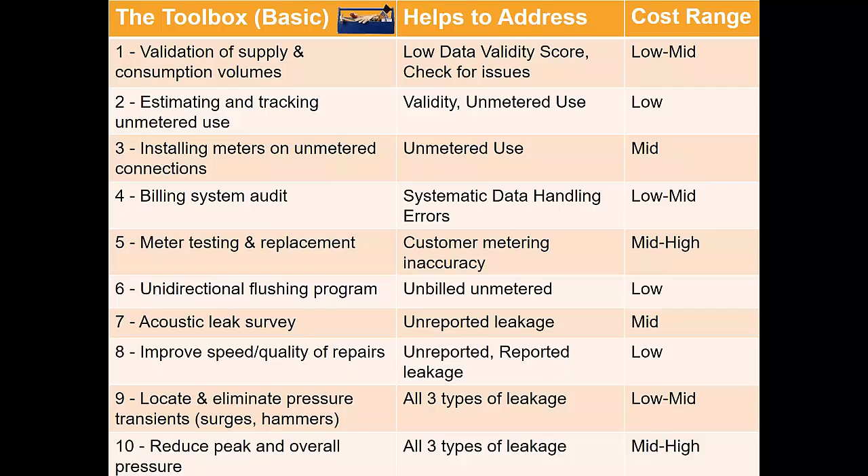Here's an example of a toolkit for a utility. This is a good listing of tools. There are actually some other tools you can use, but this is 10 different tools that talk about how you can use them to address the different types of non-revenue water, and then what the cost is of employing those tools. So this just gives you some idea of the fact that there are a lot of different tools you can use, and you should not be focused on just having one tool or another. So difficulties with implementing a whole water loss reduction program. It is definitely more interesting to folks to design and build something than to fix underground pipe.

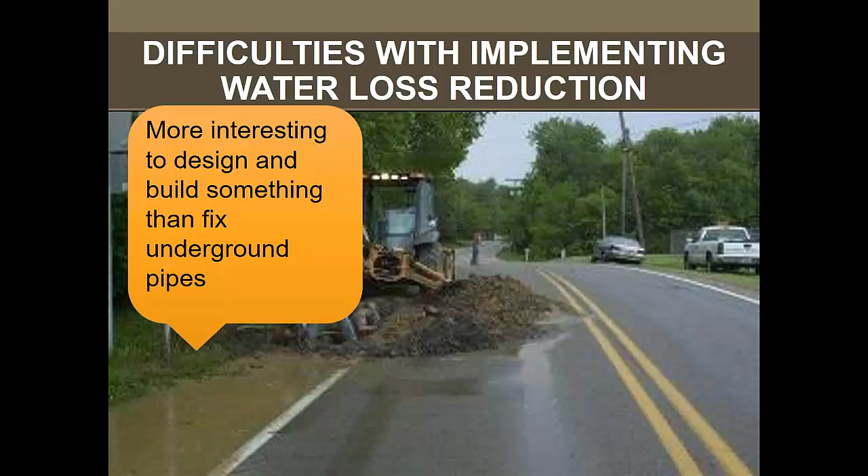It's not a sexy program. You don't get to cut ribbons. So it's a little bit more difficult to get the interest of your elected leaders and your public because it's just not that kind of program.

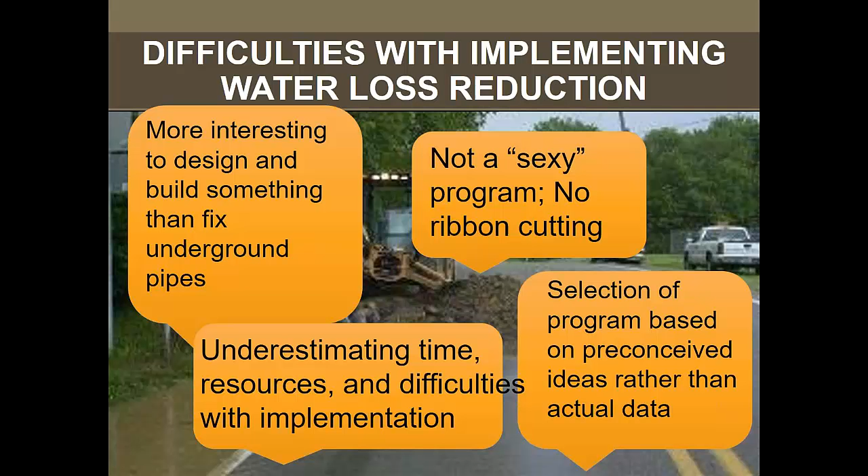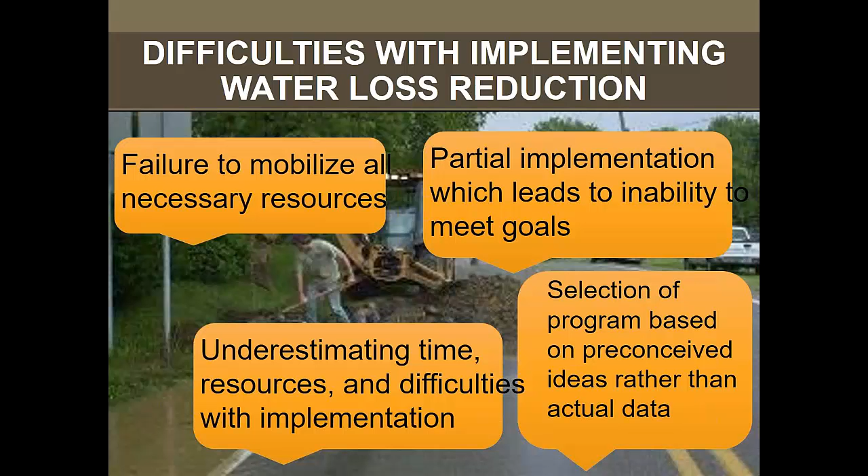One of the biggest things is selecting what you do based on your preconceived ideas rather than looking at actual data. Underestimating the time and resources and difficulties with implementing a program. Partial implementation, which leads you to not meet your goals, and then failure to mobilize all the necessary resources. So all of those things are important factors.

So what could you do at your own facility? Well, the main thing is if you haven't done a water audit, definitely start there and determine the nature of your non-revenue water before you do anything else. And then if you have done a water audit, look at the validity, see where you're at, see if you need to stay in the validity stage before you move on.

If you're above 50, look at what activities you might want to consider implementing. If you're below 50, stay in the validity stage. And then looking at your values and volumes of non-revenue water, look at the tools that can be used to address each of those and try to figure out which ones are the highest priority for your system to address the needs that you have.

So with that, we will open up to questions. I will check with Dawn. Have we had any questions come in? We do have, yes, we do have a question.

So the question is about determining criticality for the water systems, and I'm going to kind of paraphrase, I think. So they find that determining criticality for the water system can be difficult, that systems look at what the critical point is differently, sometimes at the individual customer point of view, sometimes a political point of view,

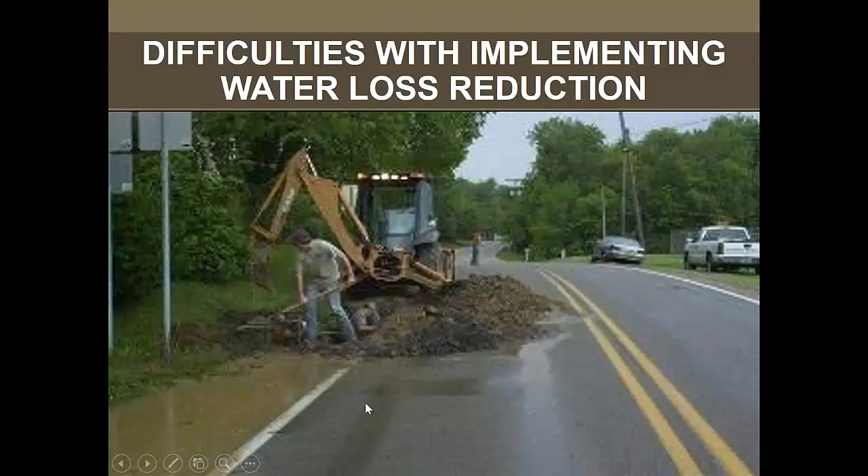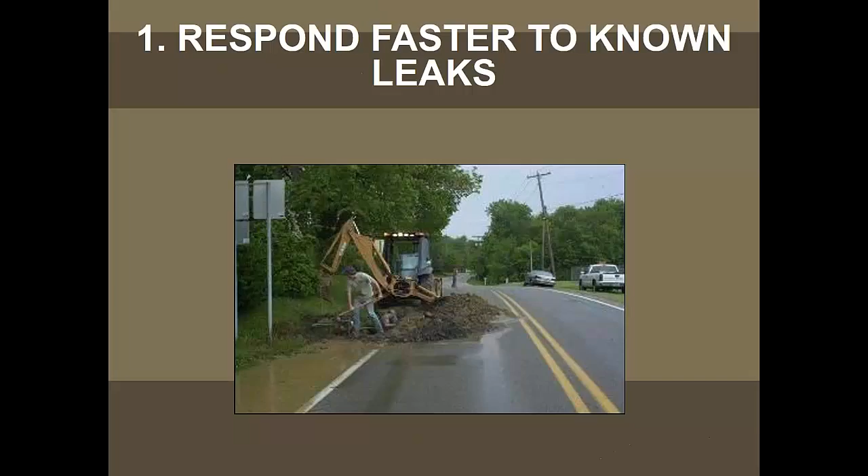So what I would suggest is you start by looking at your metrics, see where you are, see where the value and volumes are, and then set goals that best address that. So I know a utility that has used real losses per service connection per day and has set a goal based on where they are. They set a goal that reduces that number. So you don't arbitrarily want to pick, say, 20 as my goal. If you're at 200, that's going to be really hard to reduce it. So if you're at 200, you would want to pick maybe 180 or 150 and try to keep setting a goal that reduces you from where you are to a lower number.

Or if you have real losses per length of main per day, reduce that number from where you are to a smaller amount on an annual basis. So what is my goal? Do I want to reduce that number by 5% or 10%? So what would that be if I'm at 30? What would 5% less be? And then you've got to look at, well, if I'm going to reduce real losses per service connection per day, I have to have activities that would reduce real losses. So that's not going to happen unless I implement tools that reduce real losses.